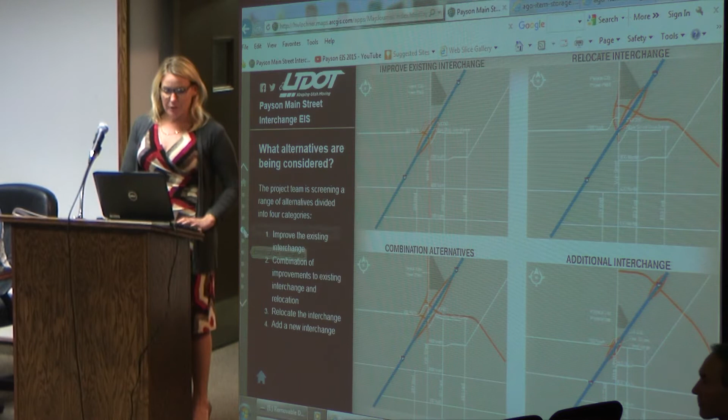So we have these different categories, and within each category we have a series of alternatives that fall under them. We have 2 levels of screening that will ultimately provide us information on what alternatives move forward. Forgive me, these are a little hard to see on the screen, but you do have this in front of you.

Let me just pull up level 1. All of these alternatives went through a level 1 screening, which was the primary screening. It deals with the purpose of the project. If you recall, we had 2 main purposes of the project. One was to ensure that by the design year of 2040 we could accommodate the traffic operations, measured in level of service. A is a free flow condition, F is total gridlock. In our urban area, level of service D is acceptable. Any alternatives that performed at level of service D or better would advance past level 1 screening and move into level 2 screening.

The other criteria, and the other element of purpose and need for the project, was that we have a geometric problem out there. The skew of the existing interchange and how it ties into the existing Main Street corridor is at a skew that has... yes, go ahead.

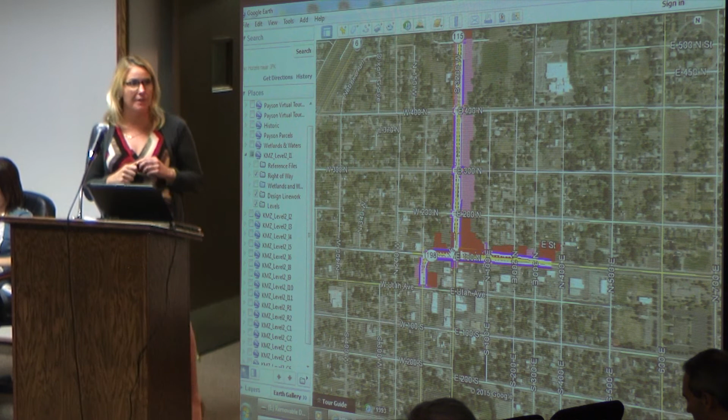I will also point out that in order to tie in that new 5-lane configuration right there at 100 North, there also is a tie-in and widening along 100 North as well. You can see that reflected here, just to make sure that intersection is operational. But that's an I alternative.

I will go through and show this, R1, so this is the relocate—and again, there are 2 relocate options. Zoom out for you. Again, you can see the relocate—this is the area of the existing Main Street. Those ramps would be closed, and this would be the new configuration of the Main Street interchange. You would have to come up here, come down underneath I-15, and then hop back onto Main Street. But then there would be this alternative roadway, a 5-lane road, that would connect down to 198, 100 North.

Do any of these plans take into consideration the road up to Elkridge, to that area, or is that a different study? It is different, and it actually is quite a bit more to the east. We did look at that early on just to make sure there wasn't anything duplicative, or that we weren't precluding one or the other. So it is a separate study.

Again, the right-of-way impacts, the wetland impacts are highlighted on this. But you can see most of the improvement, the construction, is occurring within the Greenfield, which is just that open space to the east.

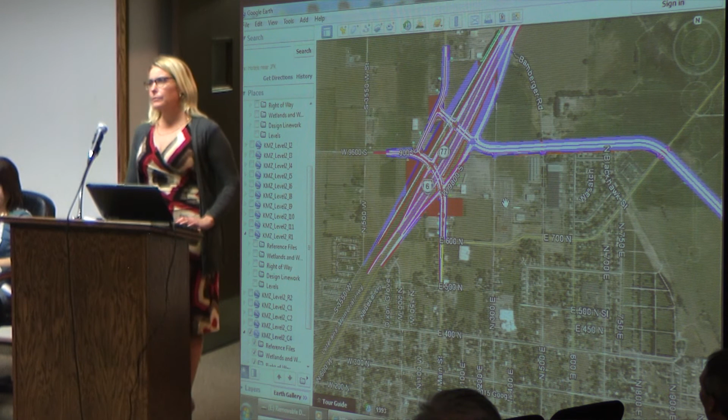One question I have is, that doesn't appear to be 90-degree intersections. Is that the rate those turn radiuses, are they okay under guidelines? They are, yep. All the turning radiuses and how it connects into I-15 and those tangents were all part of level 1 screening. So all these alternatives met those current design standards.

Some of the ramp is kind of short, and we've seen a lot of trucks fall.

I will note that the C alternatives do go up to just under 5 acres of wetland impacts. From the Army Corps of Engineers, we meet with them regularly to make sure we are working towards a permittable project. They have similar environmental laws that we are complying with in preparation of this document. That section, the Clean Water Act 404, requires that they ensure they are minimizing those impacts, if not avoiding. So at the largest scale, we've got just under 5 acres. Most of the wetland impacts are directly adjacent to I-15.

A lot of the C alternatives, which you will see in the map book in front of you, extend, the ramps have to extend along I-15, and so that's most of the wetland impacts that you'll see as far as the acreage in front of you on the level 2 screening.

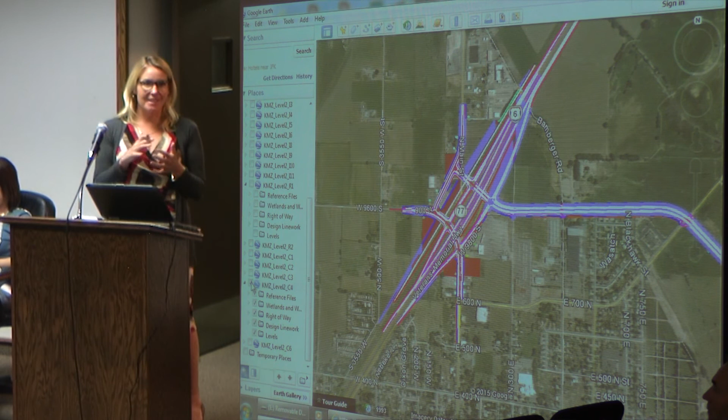A couple things I'd like to point out is that within the improved category themselves, there really isn't too much difference. The design options will have different configurations. I do think it's worth looking at several of the I options.

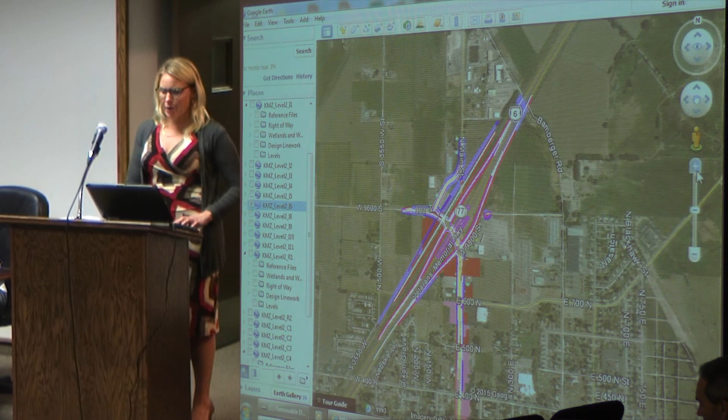Let me pull up one. It changes the direction of Main Street. You can see that on I-6, and I'll pull that up right now. So you can see that under I-6, now the main flow of Main Street north would actually be to the west. You would actually get to that intersection if you wanted to keep navigating like you would typically now, north of Main Street. So there are several I alternatives that include that kind of route to the west, Main Street, so that's a little bit different.

Again, that was done just to make sure that we ensured those proper angles, and also that they operated well from a traffic standpoint.

If UDOT was gonna proceed with this today, what's your preferred option? Do you have one? We don't.

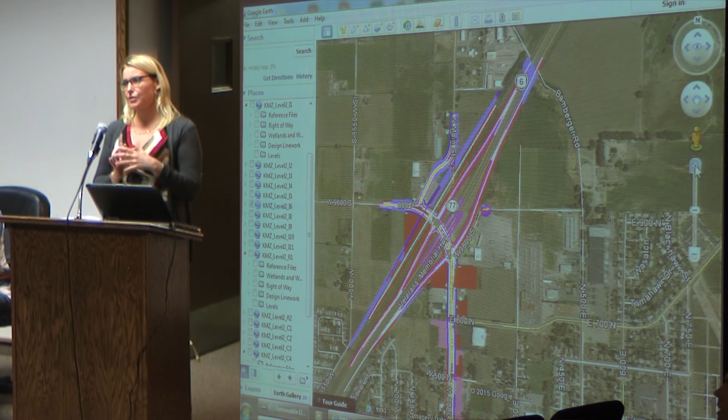We're not sitting behind closed doors, I'll make a better point. The process is absolutely, UDOT is charged to, and this federal process is all about disclosure. So we are gathering technical information and putting it out, and we really want the feedback. If there are reasons, or preference, pros, cons, what would work best on what you see in front of you, that information is really good for our technical team, for UDOT to hear, and also for Federal Highway. So again, I'll reiterate the process from this point. We have a lot of information in front of us.

It is by design that you can see none of the alternatives are eliminated just based on level 2 at this point, because what's valuable to me is gonna be something different as far as that criteria. So we really want to hear from you as a community on December 3rd when we have that public open house. As many people as we can get from the community to share with us what they think, what's preference, what's important to them. We take all of that information as a project team, and then we will narrow down this full gamut of alternatives down to several of them. So we're not picking one after December 3rd. We're gonna still have several on the table, and then we'll carry those into the draft EIS, which will get into a whole other layer of evaluation, analysis, and comparison of those remaining alternatives.

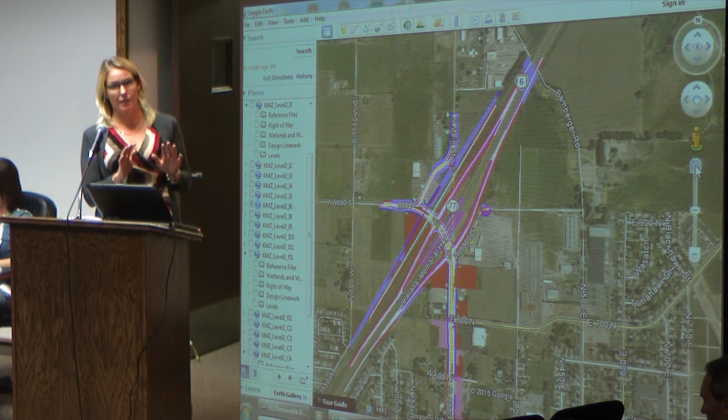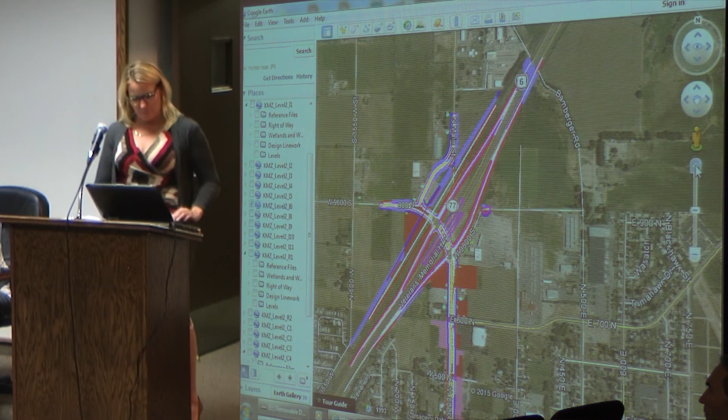What I'm leading up to is the cost in millions over here, taking into account the cost for acquiring those properties. Yes, the answer is yes. And I had this exact same question when we first got this populated, and I got it back from our design team, and we're going through our internal QC and QA. I'm like, there's no way, I want to see the cost data, show me the details. Because it was hard to believe for me that this many homes would then counter to how much concrete and how much construction to build this new road and structures with work on I-15, but indeed it is.